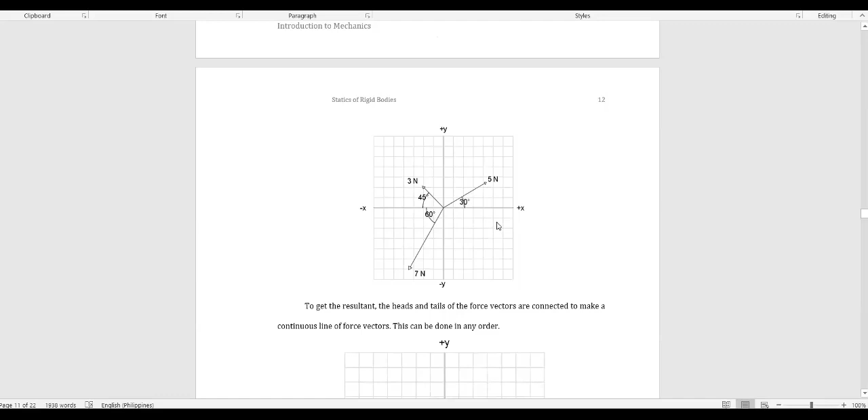Another option is to use AutoCAD software. So let's try an example. We have here three vectors: a 5 Newton vector at 30 degrees from the positive x-axis, a 3 Newton vector at 45 degrees from the negative x-axis, and a 7 Newton vector going downward at 60 degrees from the negative x-axis. Let's draw that.

If you want to draw, let's say this is our Cartesian plane. I'm using AutoCAD for this. So first, let's put this 5 Newton force.

Before you start, I forgot to mention, you have to set a scale. I'm using the millimeter unit, so my scale would be: for every 1 Newton, that is equivalent to 1,000 millimeters.

So if I'm going to plot this, you can also do this manually. 1 Newton is to 1,000 millimeters, or you can do it as 1 Newton to 10 millimeters, something like that. So for 5 Newton, that is 5 Newton, I'm using 5,000 millimeters. Oops, sorry.

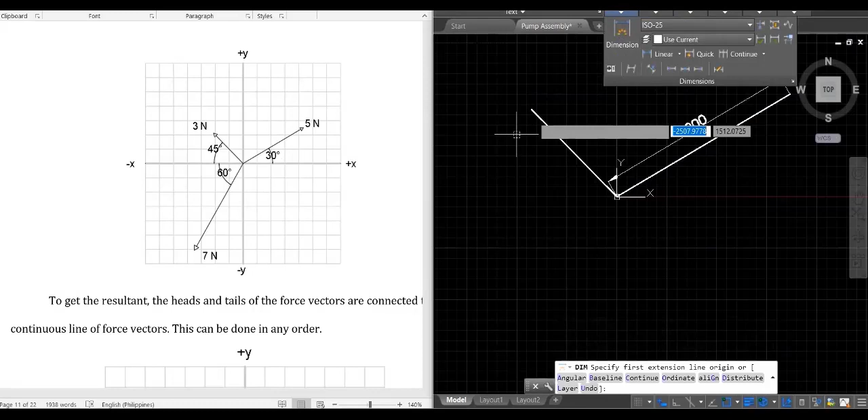This is 3,000 millimeters, since 1 Newton equals 1,000 millimeters, representing 3 Newton.

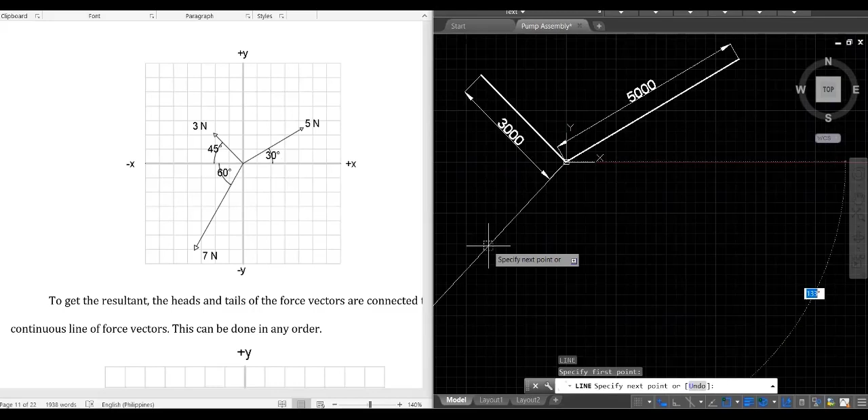Now let's try this one: 7 Newton, that would be 7,000 millimeters. For the angle, since I'm measuring from the positive x-axis, going from here, that becomes 180 minus 60, so I will set this as 120 degrees.

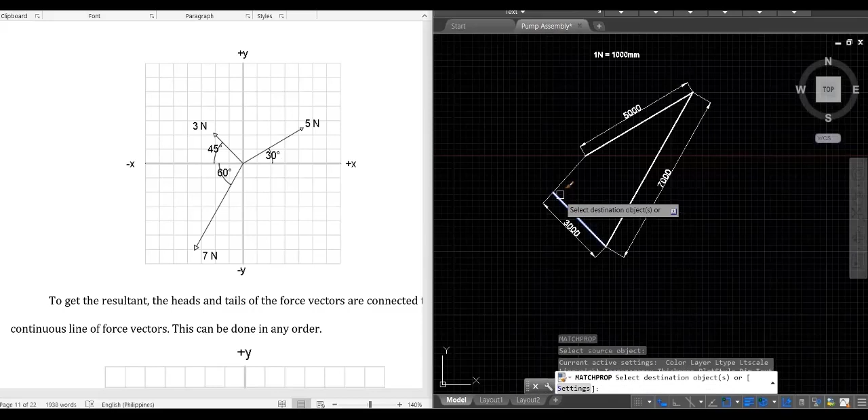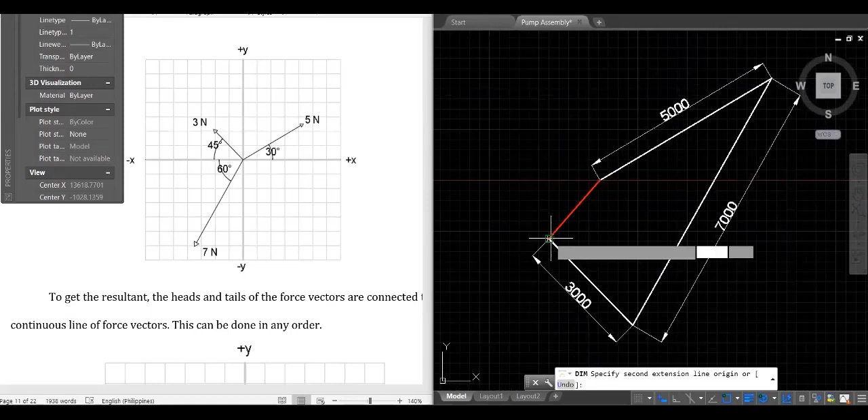So how do I get the value of the resultant force? Of course, just measure it. So the value of our resultant force would be 1934.75 millimeters.

Now if we convert that, since 1 Newton is equal to 1,000 millimeters, that would become 1.934 Newton. So that is the magnitude of the resultant force.

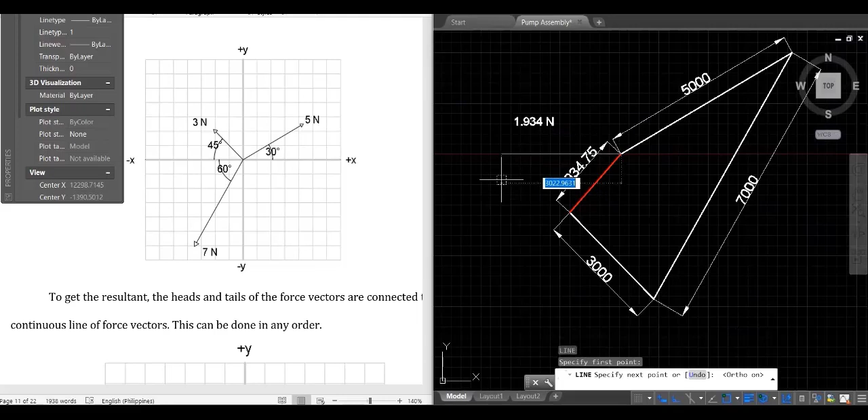So you see, we didn't need to solve it mathematically. And then for the direction, let's say we have here the negative x-axis as our reference. So if you measure it manually, you get the angular direction.

Dito na lang natin lagay. That would be 48 degrees from the negative x-axis.

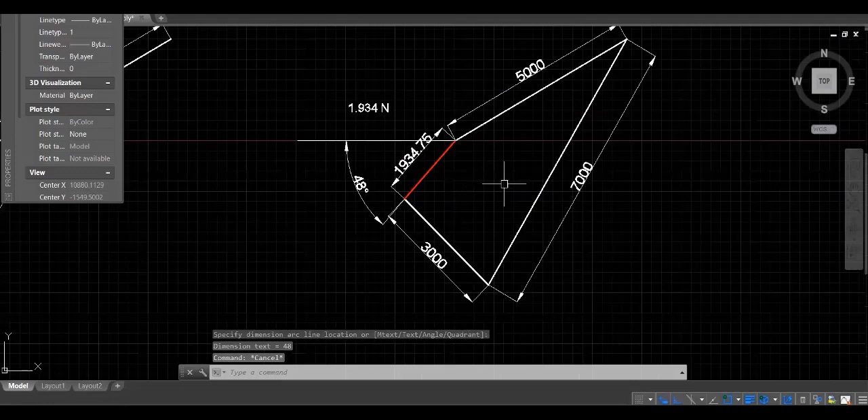Okay? So, yung ganitong style kasi, let's say, tingnan nyo, hindi tayo nagsosolve pero nagdodrawing lang tayo. Meaning, we are using graphical method. Meron itong mga syempre, lalo na kung saan kayo gumagawa, sa mano-mano kayo na measurement. So, magkakaroon kayo ng error.

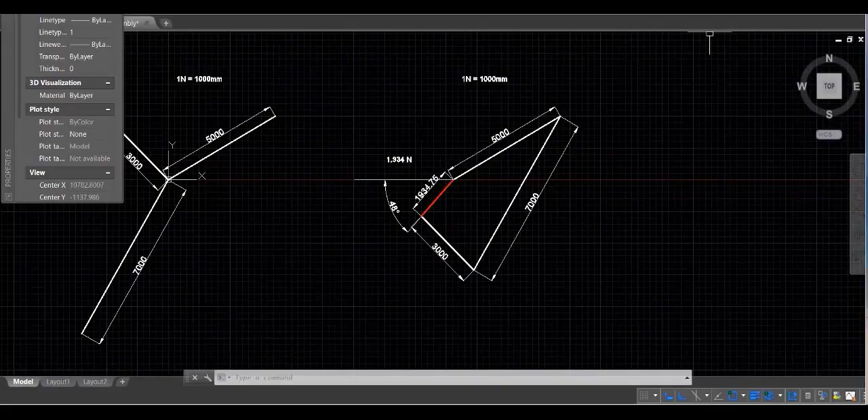So, let's try to manually solve this para matry natin kung talaga tama ba yung nakuha nating sagot. Let's try to solve. Ayan. So, using the previous method, kung naaalala nyo pa yung mga formula natin.

So, in order to solve for the resultant force, that is equivalent to the square root of the summation of all force x squared plus the summation of all force lying on the y squared. Okay? So, how can we solve this one? First, we have to solve the summation of forces along x. So, that is equivalent to kailangan yung isolve lahat ng x component bawat isang vector.

Okay? So kung tatandaan nyo pa yung previous discussion natin, so this will be, let's say yung ating 5 Newton. So 5 Newton multiply by cosine 30. Okay? So, class, napakaraming paraan, napakaraming method, napakaraming style sa kung paano mag-solve ng

vector at saka resultant force. So, if naiintindihan niyo yung principle na to, you may create your own style. Pero kung medyo hindi niyo pa siya nagigets, just follow my style na lang muna, no?

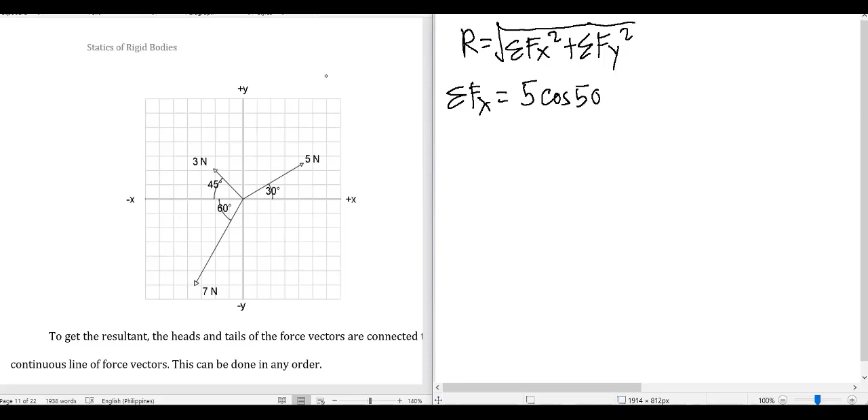So, this time, I'm using, this is positive, ano? Okay, sorry. So, this is positive. Okay, remember from the trigonometry? First quadrant natin is positive yung x, positive yung y. Second quadrant, negative yung x, positive yung y. Sa third quadrant, negative yung x, negative yung y. And then sa fourth quadrant, positive yung x, and then negative yung y.

If you want to use this sign convention, so you can use the cosine and then the given angle based on the x-axis every time. Okay, so paano ibig ko sabihin dyan? So we have 5 times cosine 30.

Okay, so this time itong 3 Newton, mapapansin nyo nasa negative x-axis siya. So I'm using negative 3 Newton cosine 45. Okay? And then this 7 Newton, this is 7 Newton. Nasa negative third quadrant, nasa negative x na naman siya. So that would be minus na naman.

Kasi tandaan nyo to, pinag-usapan natin dito sa summation of f of x is yung puro x lang muna. So ulitin ko. Sa 5 cosine, kaya siya positive kasi nasa positive x-axis siya. And then kaya siya naging minus 3 cosine kasi nasa negative siya, quadrant 2, negative yung x dito. Sa quadrant 3 naman, minus na naman yung 7 kasi nasa negative din siya. Minus 7 cosine 60. Okay, so that would be 5 cosine 30 minus 3 cosine 45 minus 7 cosine 60.

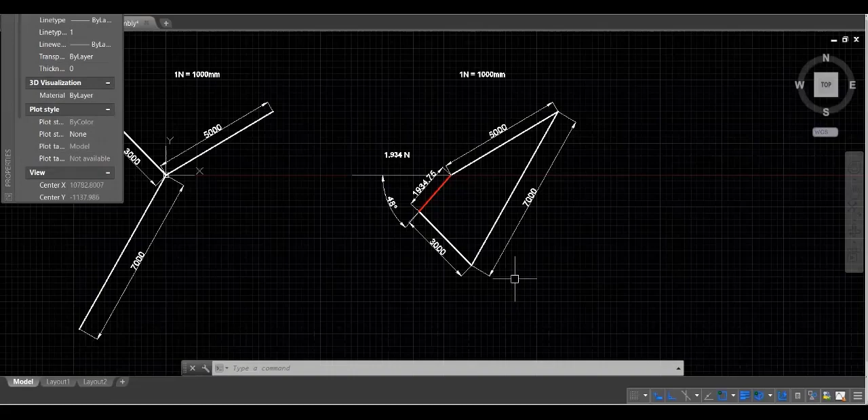1.933 Newton. Okay? So ano yung sagot natin kanina? Using AutoCAD? We have 1.934. Okay? So, meron lang siyang konting discrepancy. Maybe ito yung tama, maybe this is the exact value. Or maybe this, itong solve natin.

Okay, so kaya lang nagkatalo kasi tayo dito sa may pag-solve natin kanina dahil nag-round up ako dito sa pag-solve ng fx at saka ng fy. Meron na tayong mga nadi-disregard na decimal points diyan. So kaya nagkaroon siya ng discrepancy. Other way, almost the same lang, 1.933 and then dun sa ating graphical is 1.934 Newton. Okay? So I hope na gets niyo yun.

And then solving for the angle theta, so the angle theta would be the inverse tangent of summation of forces y, summation of forces x. So that would be, this is absolute value, no? Absolute value yan. So negative 1.44 all over negative 1.29. So that is equal to inverse tangent 1.12. That is 48.14.

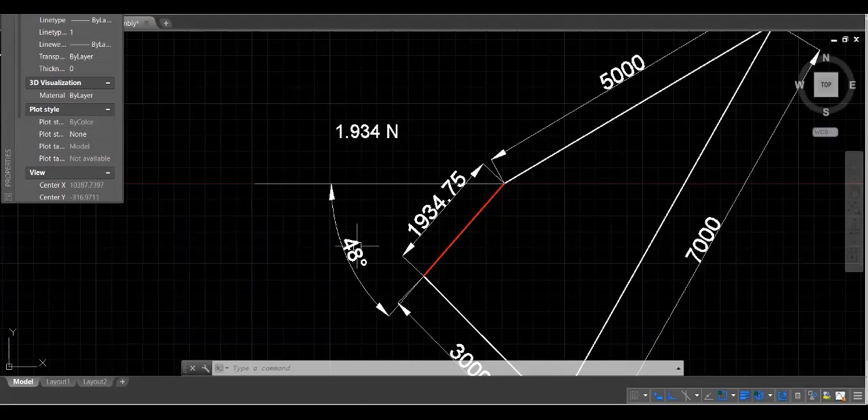48.14 degrees. Okay, so tingnan natin kung kaparehas pa nung angle. Ayun, dito kasi walang decimal yung degree natin, so 48 degrees. Ngayon, dito sa graphical method natin, mapapansin nyo madali natin malolocate yung angle kasi graphical naman ito eh. Okay, ito yung 48 degrees na yun.

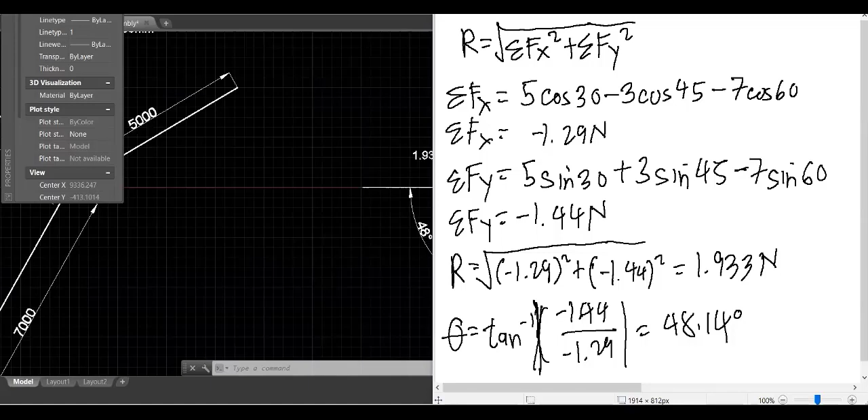But what about, let's say hindi kayo gumamit ng graphical. So paano nyo malolocate itong 48 degrees na angle? Saan ba siya naglalagay?

So lagi nyong tandaan, let's say this is the Cartesian plane. This is positive, positive. This is negative, positive. This is negative, negative. And then this is positive, negative.

So para hindi kayo malito kung saan nasan itong angle na to, kasi hindi nyo talaga alam kung nasaan yan. Unang-una, tingnan nyo na lang itong fx at saka fy. Yung summation of fx ko, yung resulta ng lahat ng fx ko, naging negative. So dalawa na lang yan, either ito yung negative sa quadrant 2 at saka quadrant 3, parehang negative yung x. So alin lang sa dalawang quadrant na yan, doon nagpunta yung resultant natin.

At yung y ko is negative din. So meaning, I have x negative, y negative. So probably yung resultant force ko is dito nagpunta. Ayan, ito yung resultant force ko. At lagi nyong tatandaan, yung nasolve natin na resultant na to ay lagi based on the x-axis. So ito yun.

48.14 degrees. Okay? So sana na-gets nyo kung paano natin na-solve at saka na-graph yung resultant force natin.

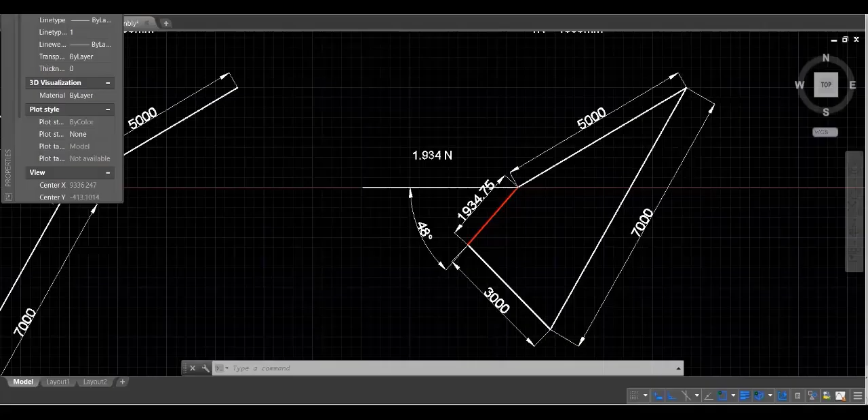Okay, so let's try. By the way pala, napag-usapan namin sa RTY na mali itong nasa module. Hindi niya napansin itong sa 3 Newton, mali yata siya ng pagkakalagay. Well, anyway, at least na-solve naman natin.

Ayan. So let's try another example.

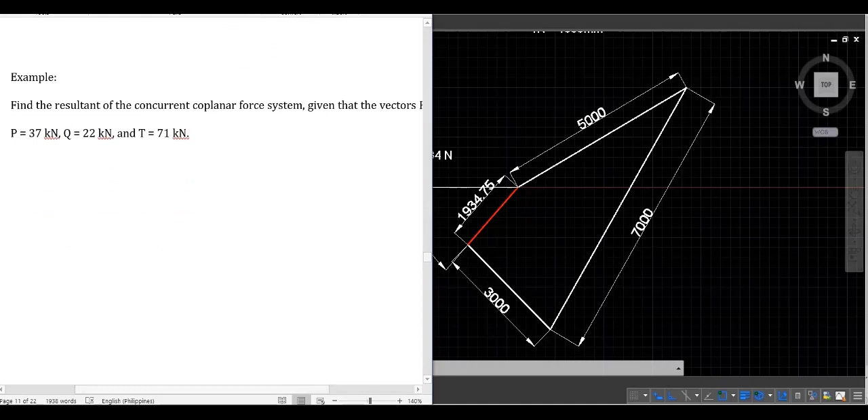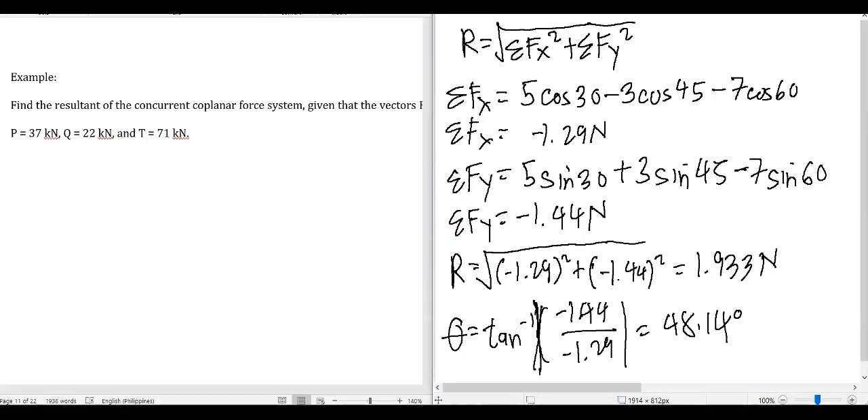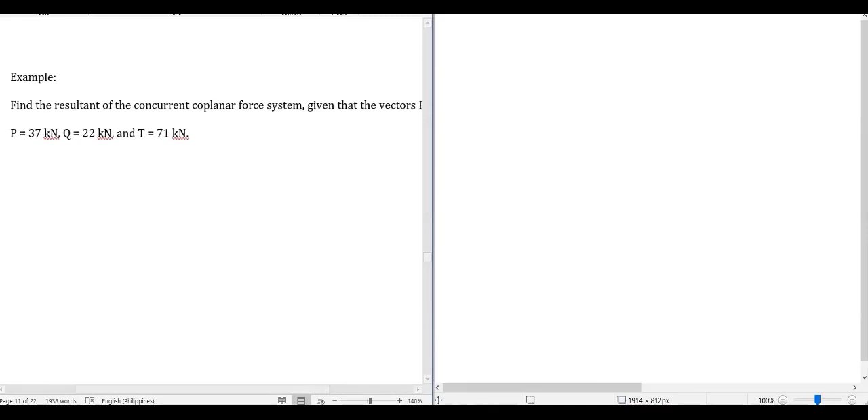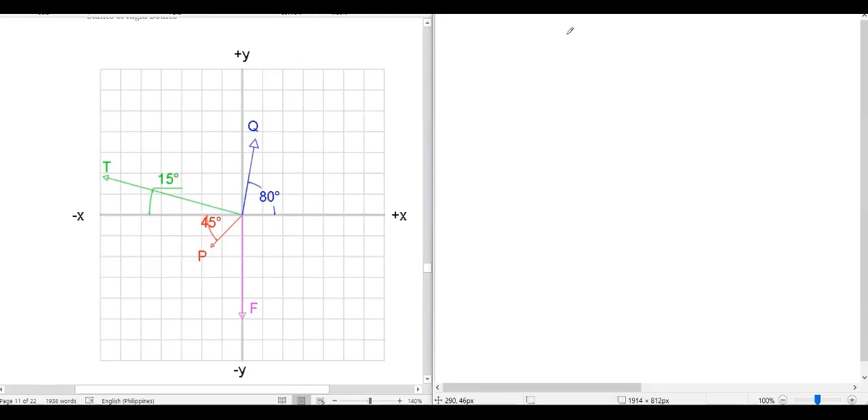Okay, so let's try to draw this one. Let's say we have the Cartesian plane here. Hindi na ako gagamit ng line, masyadong ano yun. Okay, so yung vector Q, that is 80 degrees. Yung vector T, that is 15 degrees. Okay? Yung vector P, that is 45 degrees. And then yung vector F, that is 270 degrees from dito, pero dito na lang is 90 degrees na lang siya.

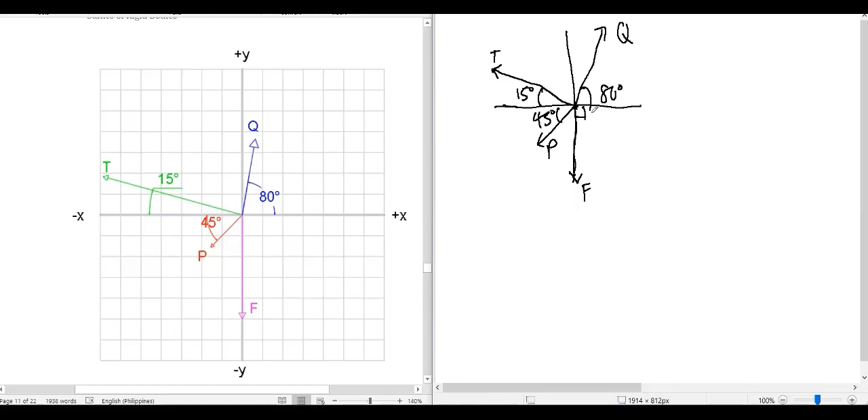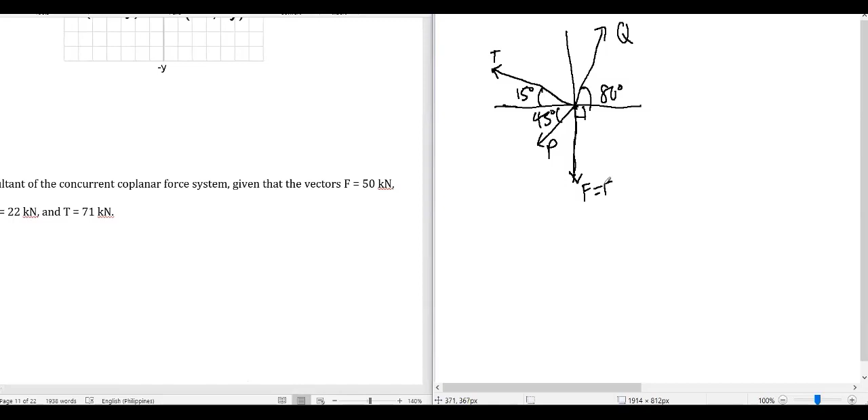Ayan. Then ano na nga yung mga value? Lagyan natin yung mga value. So vector F is 50 kilonewton. Vector P is 37 kilonewton. And then vector Q is 22 kilonewton. Vector T is 71 kilonewton. So find the resultant force.

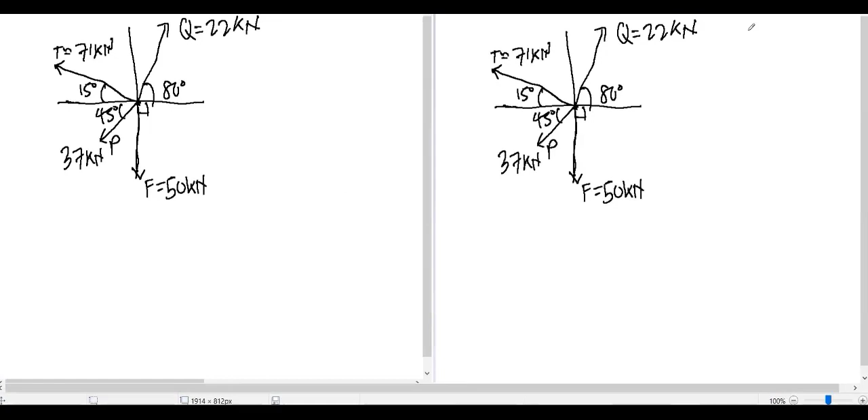Okay, so again, same method. Ulitin ko. Ayoko nang gumamit ng ibang method, ano? Although, again, sabi ko, maraming style. Pero kung wala pa kayong naisip na style, gawin niyo na lang yung ginagawa ko.

Okay? So again, to solve for the resultant force, that is equivalent to the square root of the summation of force along x squared plus the summation of force along y squared. So solving for the summation of the force along x, unahin natin itong force Q.

So positive x-axis, nasa quadrant 1, so that would be positive 22 cosine 80. Okay? What about, 71 ba talaga yun? Mukhang nagkamali ako, 71 pala talaga. Okay, so 71 is going negative x-axis, so we have to use minus 71 cosine 15.

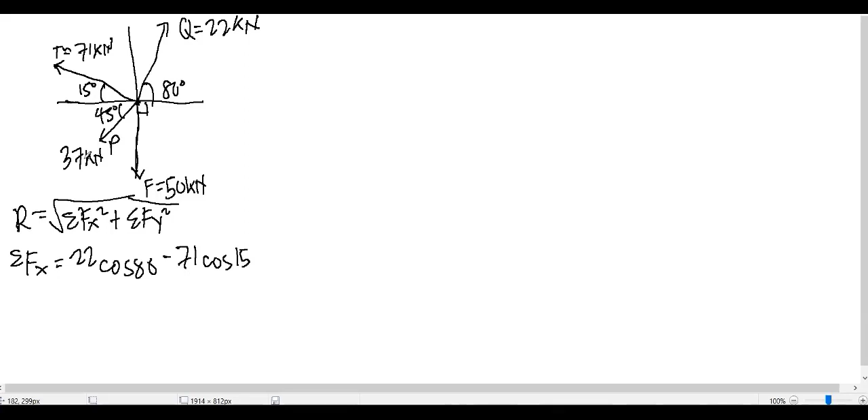Okay? And then ito na namang vector P, going to the left na naman. So negative x-axis, negative 37 cosine 45.

And then this one, saan ito? Going left, going right? So hindi natin alam kung saan ito papunta. Ibig sabihin, wala siya, going upward and downward, sabihin zero kasi yan. Pagka ganyan, zero siya, wala siyang x component. Kasi kung babasahin nyo naman, magkakaroon siya ng x component kung, let's say, tulad nito, these are both going up and going right. So ito kasi pure going down lang, sabihin sa y-axis lang siya, so zero yung x component niya.

So solving for the summation of fx, that is equal to 22 cosine 80 minus 71 cosine 15 minus 37 cosine 45. That is negative 90.92 kilonewton. So that is the summation of x-axis.

And then para sa summation ng ating y, so that would be, again, dito na naman tayo sa 22. So going up, that would be positive 22, so this time, sine 80.

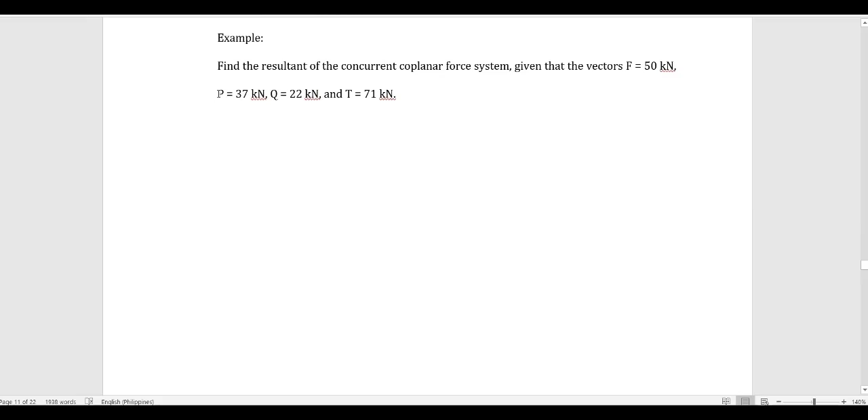Okay, so kung mapapansin nyo, nagkaroon ng discrepancy naman. Nagkaiba kami ng lagay ni Sir TY, ano? Kasi yung nilagay niya rito sa force P is 37 kilonewton. Pero dito sa solution niya, yung force P na given, nagkapalit yung P at saka yung Q niya dito sa P at sa 22 at saka 37, ano? Kaya nagkaroon ng, let's say, nagkaiba ng ano. Pero this is correct, ano, kung ito talaga yung value, kaya lang nagkapalit kasi.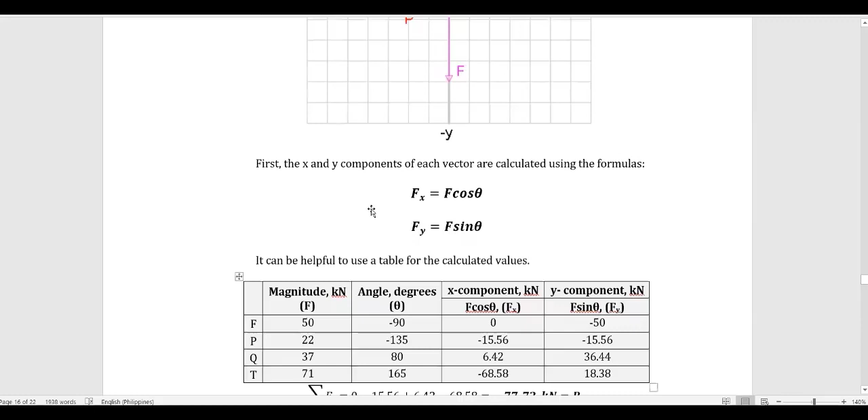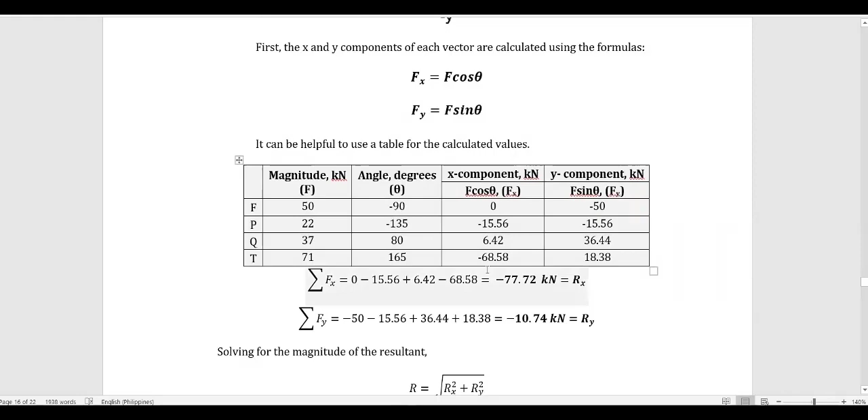Pero mas maganda sundan niyo na lang yung sinolve ko, okay? Kasi doon ang sinundan ko is etong given talaga. Okay? So dito kasi sa solution ni Sir TY, nagkabaliktad kasi siya, yung Q niya napunta sa P, then yung P napunta sa Q. Okay? So either way, parehong kung talagang ito yung ano, tama rin naman itong kung paano siya, this is another way on how to solve, no? Nasa sa inyo na lang talaga kung paano yung mas gusto nyong style. Napakaraming yung style ng pag-solve. Okay, so again, explain ko sa inyo bakit ko nasabing marami, ano.

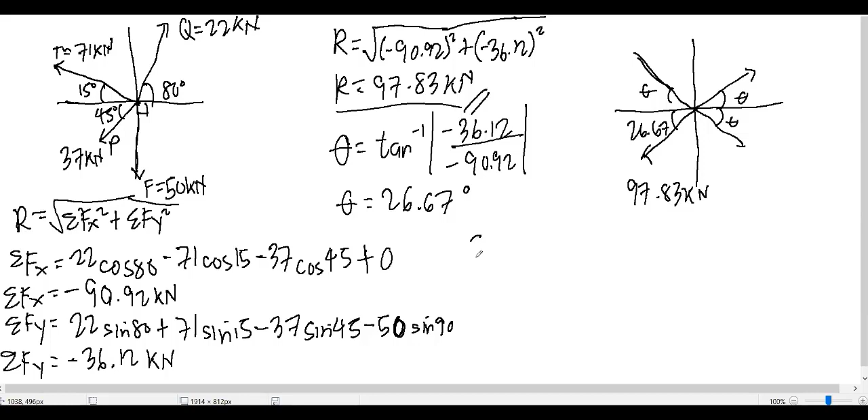Tulad na to, ito pwede nyo itong masolve. Let's say itong f of x, pwede ko yan masolve, pwede nyo gawin ganito. F of x is equal to, let's say, 22 cosine 80, yan, the same pa rin. And then ito, pwede kung gusto nyo, hindi nyo consider itong sign convention, hindi nyo consider yung plus minus x dito, para hindi nyo makabasa yung plus minus y dito.

Ganito ang style naman doon, pwede nyo gawin, lagi kayo dito naka-base sa positive x-axis. Okay, so paano yan? Ganito. Let's say, ginawa ko dito, 22 cosine 80, sabihin kasi 80 degrees mula siya dito sa positive x-axis. And then puro plus lang ako ng plus. Plus, ito naman, 71.

71, cosine, sinusukat ko ulit yung angle mula dito. Kung ito ay 15, ito ay 165. So cosine 165, at plus ulit ako. Kung ayaw nyong malito sa sign convention ng mga quadrant, ito yung isang style. Plus ulit ako, ito naman sa 37. So 37, cosine naman ito, dito lang ulit ako magsisimula.

Mula dito, this is 180, plus 45, that is 225. So I will use cosine 225, plus lang ulit ako. Ay, 0 na pala ito, pero lagay pa rin natin, 50, baka hindi kayo maniwalang 0. So cosine pa rin. Another method, magmula dito sa positive x-axis, sukatin ko siya dito, that would be 270. So cosine 270. Solving for the summation of f of x, that would be 22 cosine 80 plus 71 cosine 165 plus 37 cosine 225 plus 50 cosine 270. So it will be the same, 90.92, negative 90.92.

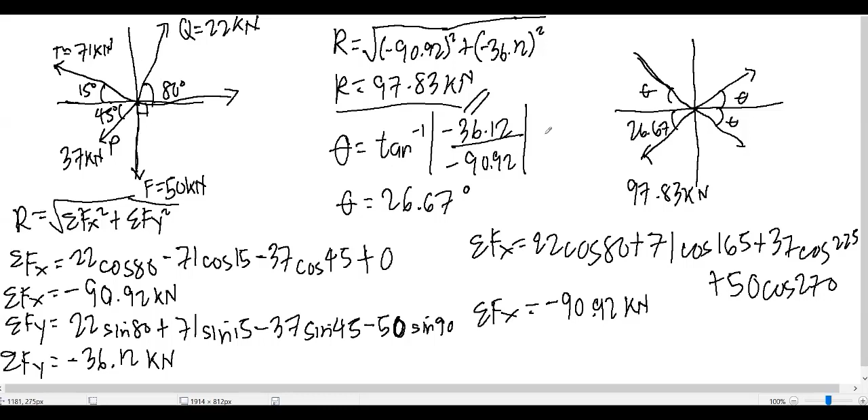Nasa sa inyo naman yung style, as long as tama yung makuha yung sagot. At syempre, makukuha yung sagot kung tama yung ginagawa nyo. Tama rin naman ito. Nagkaiba kami ni Sir TY kasi nagkapalit siya ng given, nagkapalit yung P at saka yung Q.

So for our last topic here sa vector, we have the common vector operations. We have the vector addition, the vector subtraction, dot product, and the cross product. Paano ba gumagawa? Madali lang naman ito.

So this would be yung vector addition. Let's say we have vector A, let's say this is vector B. Vector addition, so this would be what? This is vector A, this is vector B, this is vector A plus B. So this is how you solve, yun lang, parang nag-solve lang kayo ng resultant. Yun lang yung vector addition, nagets ba? Parang sinolve nyo lang itong resultant, that is the vector addition.

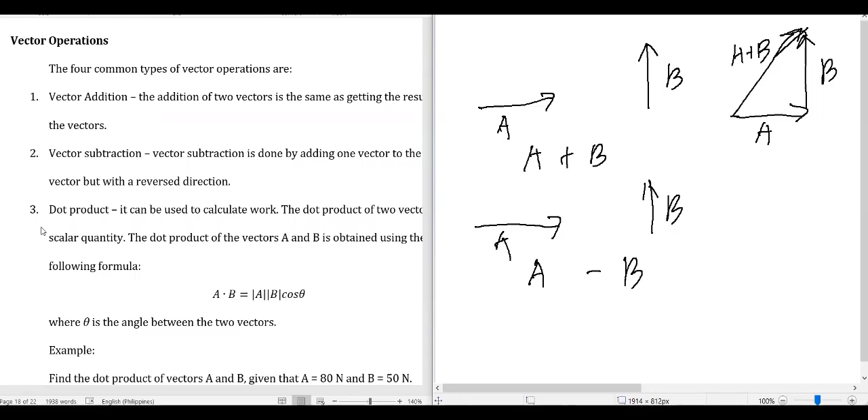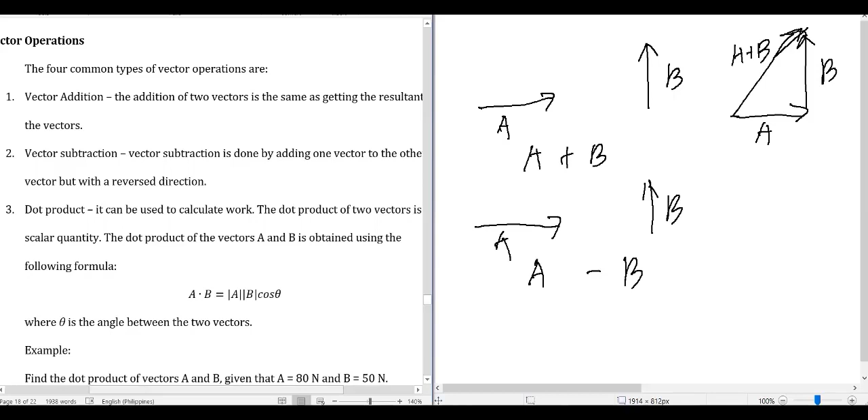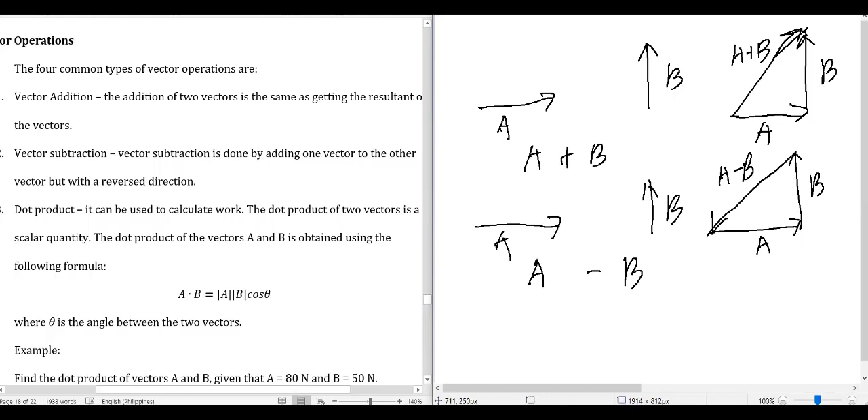So for the vector subtraction, paano naman yung sa vector subtraction? Ganito lang, let's say this is vector A, vector B, so let's say vector A minus vector B. Ang sabi dito, vector subtraction is done by adding one vector to the other vector but with a reverse direction. Meaning, if you add the two vectors, let's say this is vector A, and this is vector B, then add this one, this is the resultant, kaya lang yung direction nyo is eto. This is vector A minus B.

Next we have the dot product. So paano yan? Meron na palang example dito. In order to solve for the dot product, ito yung nagamit sa pag-calculate ng work. That would be the absolute value of A multiplied by the absolute value of B multiplied by cosine theta, where theta is the angle between the two vectors. Ito yung example niya. Let's say we have vector A and vector B. Vector A is 50 degrees from the positive x-axis, and vector B is 20 degrees below the positive x-axis. So solving for the dot product, yung theta is yung pagitan nila, that would be 70 degrees. Dot product, that would be A times B absolute value, times cosine theta. So 80 times 50 cosine 70, so 1368.08. That is the dot product of the two vectors.

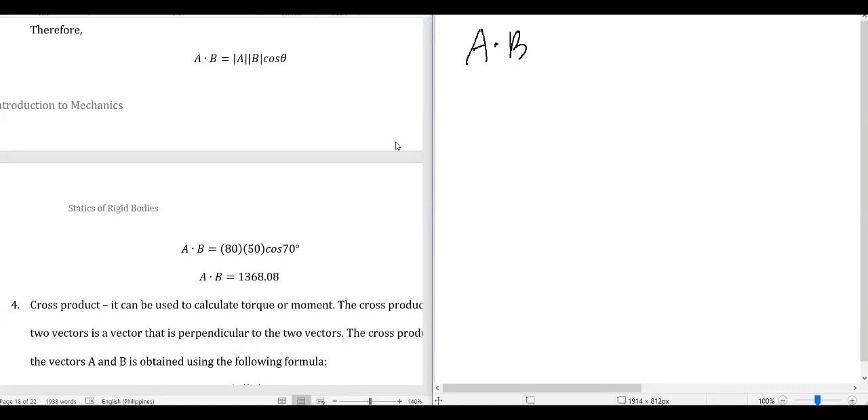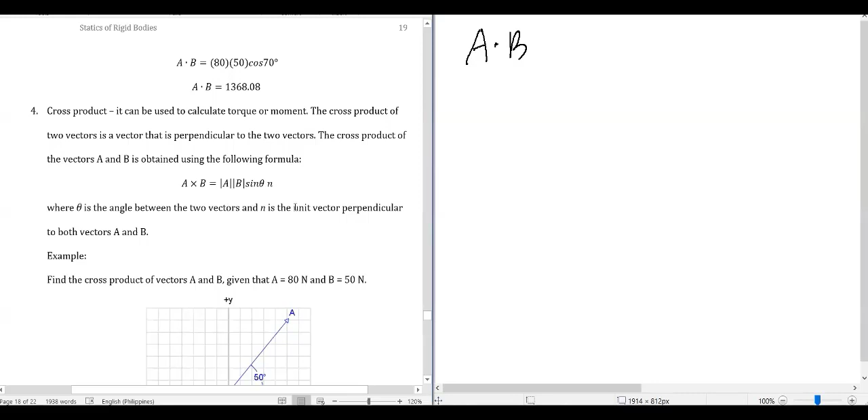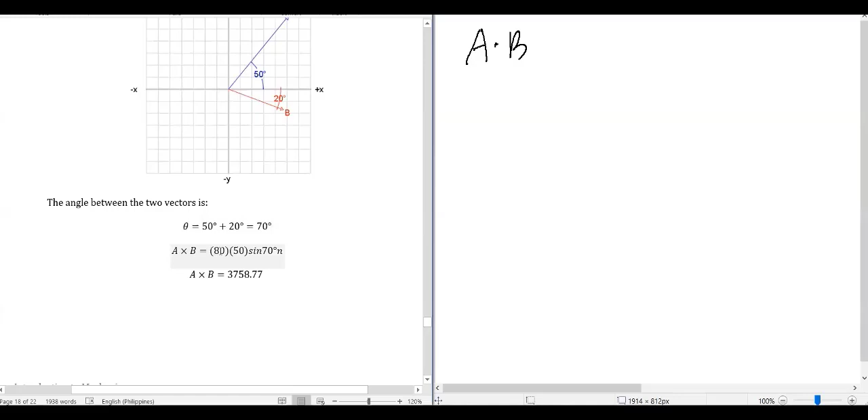And for the cross product naman, yung kanina used for work, so ito naman used for torque and moment. Almost the same, yung cross product tsaka dot product, ang pinagkaiba lang, we're using here sin theta and n, where theta again is the angle between the two vectors, and n is the unit vector perpendicular to both vectors A and B. So solving for the cross product would be 80 times 50 sine 70, that would be 3758.77.